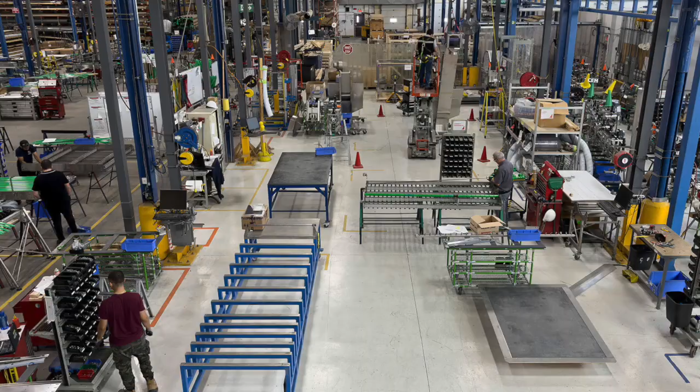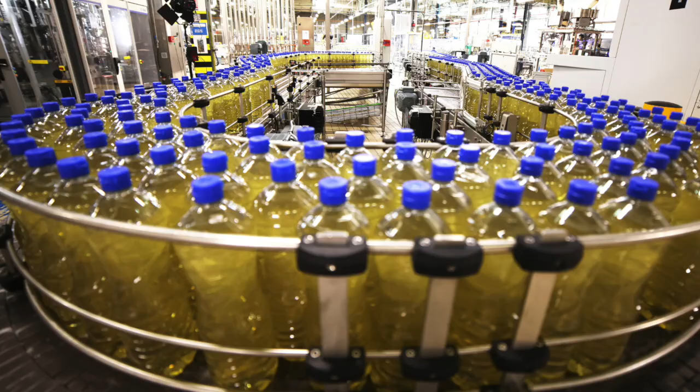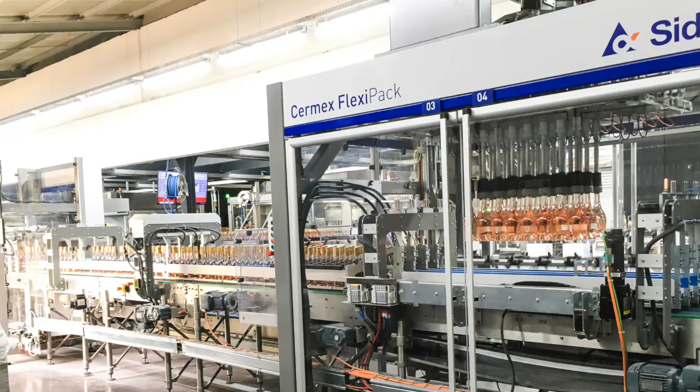Sidel is owned by Tetra Laval, which also owns Tetra Pak and De Laval. We're involved in multiple industries globally. From our Canadian facility here in Laval, there are two primary market segments we manufacture and provide services for: one is FHPC, food, home, and personal care, and the second is wine and spirits. These are the two markets we manufacture equipment for locally, because they typically require very complex, custom-made solutions, and here in Laval we have the expertise to handle that.

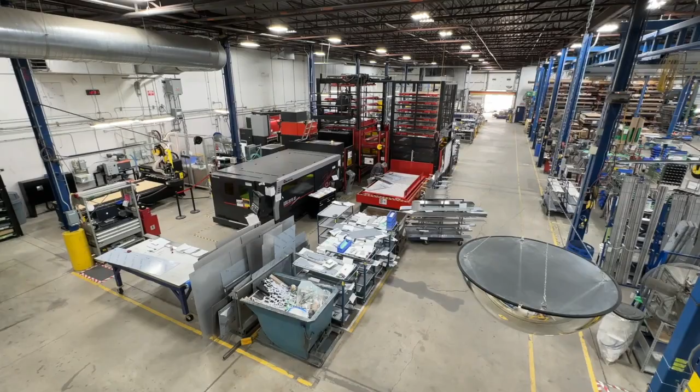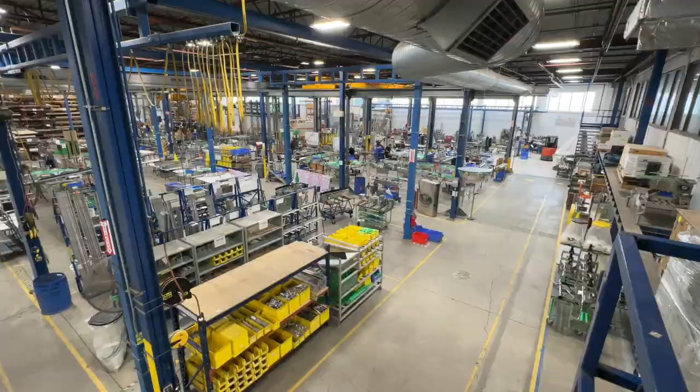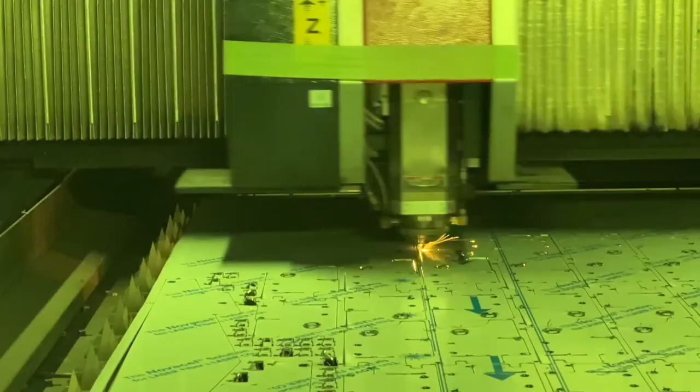The Laval facility is the only Canadian facility where we manufacture these products. What we supply to the North American market is essentially conveyors and cap feeding. We have 9,000 square meters of manufacturing and office space, and 217 employees. We also provide engineering services, and we are the hub for North America for engineering services.

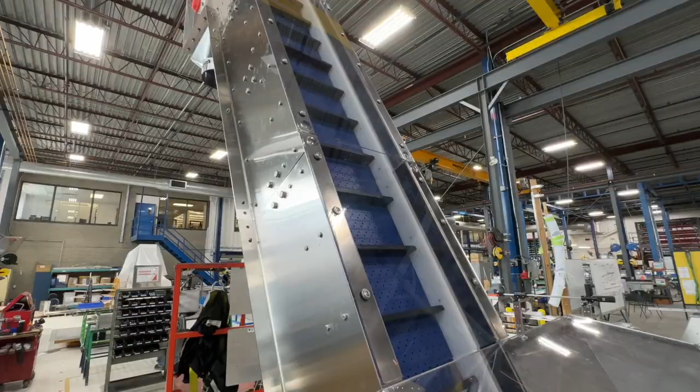Apart from FHPC and wine and spirits, we also handle beverage on a case-by-case basis, including alcohol and non-alcohol beverages, which is an important part of the market here in North America. These services set us apart in that we're able to put it all together to provide the necessary equipment and services to meet our customers' expectations.

Sidel is present in more than 190 countries with over 40,000 pieces of equipment installed all over the world. Sidel Canada is our main manufacturing facility in the region.

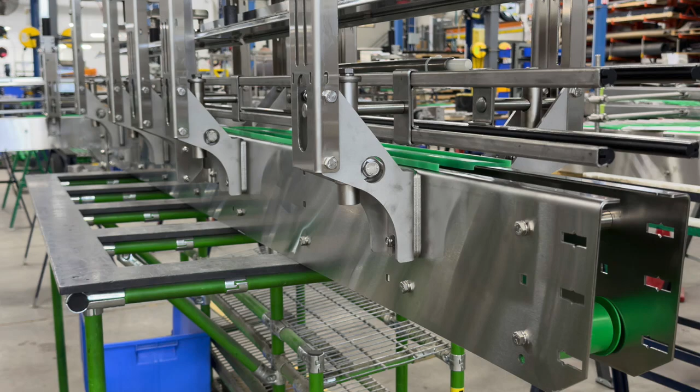When it comes to packaging innovation, Sidel has always been at the top of the chain. We're always looking into lightweighting our bottles in a smart way. We have a packaging team that sits with the customer and with our marketing team, and together we define what their goals are.

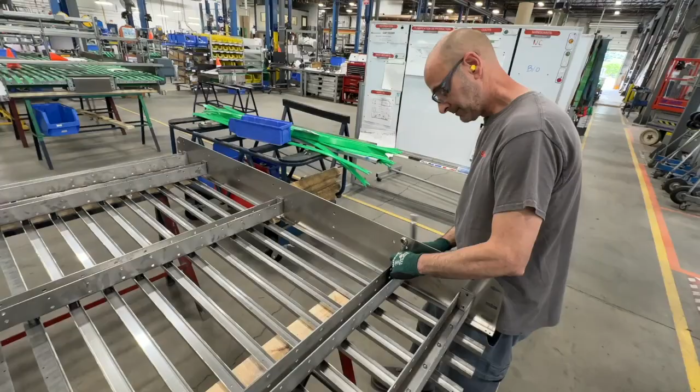When it comes to the packaging itself, there are certain aspects we need to cover. Customers tell us they'd like to achieve certain targets in terms of weight. With our feasibility tests, we can tell them exactly what's feasible for their products - yes, we can go up to 7 grams, we can go up to 8 grams, depending on the type of product they want to bottle.

We help the customer achieve those targets with our technology. Without that expertise, it wouldn't be possible - it takes a lot of engineering know-how to develop equipment aligned with consumer trends.

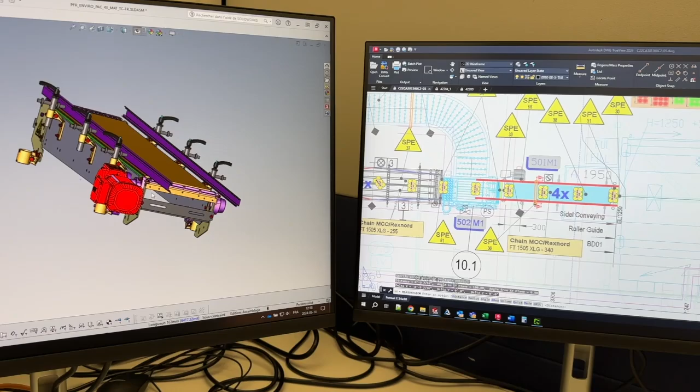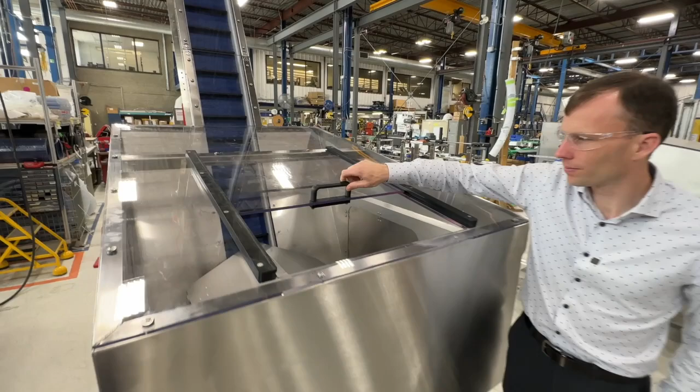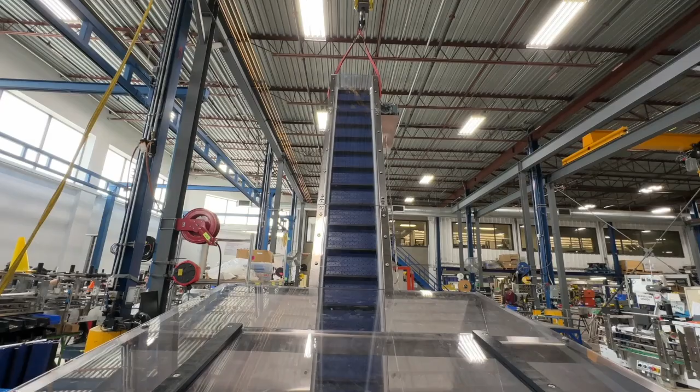We design and manufacture various types of stainless steel conveyors in different sizes and functions depending on the product we transport. The conveyors link all the machines on the line, creating synergy to maximize performance, and are important for accumulating product between machines to maximize that performance. It could be cans, glass, bottles, whatever type of product the customer has - we personalize all those conveyors to the customer's specifications.

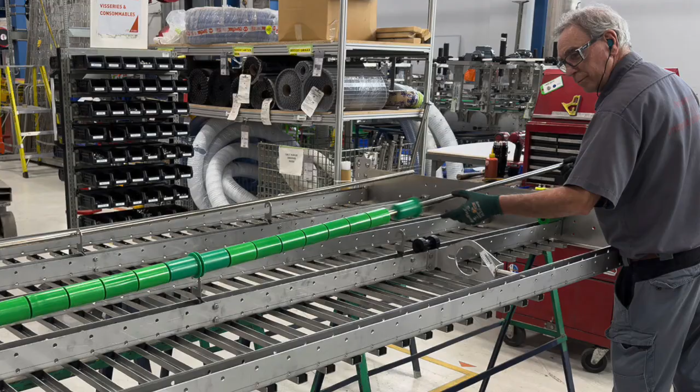Safety is very important for us. Internally we are certified ISO 45001, and we have dedicated people to ensure compliance of our products with all safety regulations.

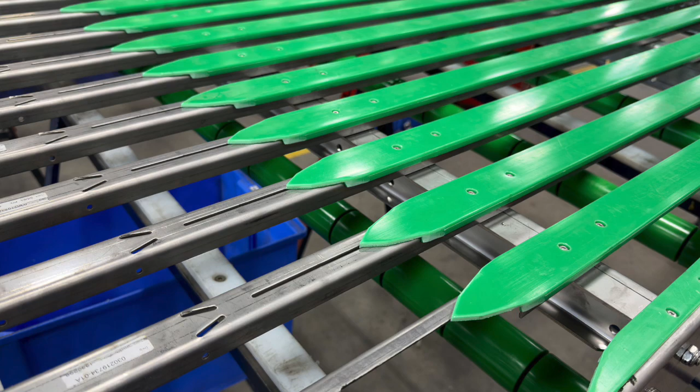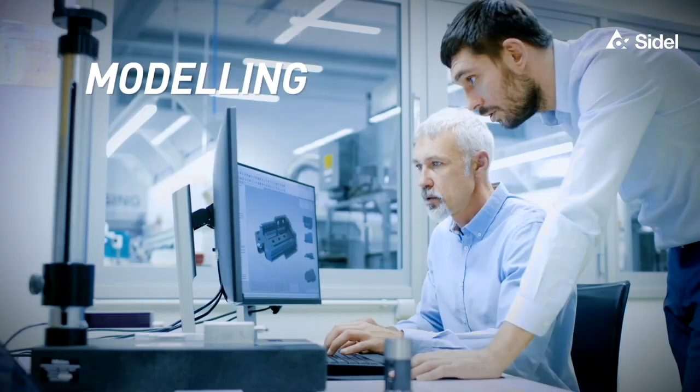The engineering services we offer differ from other companies in that we use a theoretical approach to line design, which is a proven methodology. It involves designing a line with certain parameters - V-graph, accumulation, mean time to repair, and so forth. These are parameters that are part of our design when we put together a line for our customers.

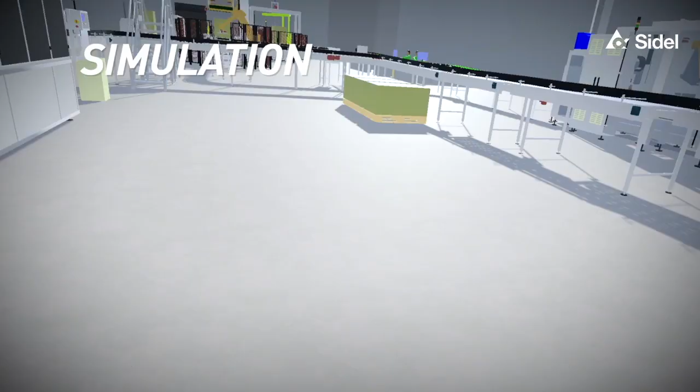What we do is simulate these solutions. The simulations allow us to give our customers a guarantee of performance, which really sets us apart from our competitors, in that we can, with certainty, simulate these line designs. Once simulated, it shows the customer exactly what they can expect from our line designs. That's very attractive to customers, in the sense that they're not just buying equipment from us, but a performance guarantee that they can hold us to and that we commit to.

The simulation tool is called Paxi. Essentially, we insert parameters and build a model of the line. Once the line is modeled, we run iterations and iterations of simulations that give us an overall performance we can commit to our customers.

We have conveyors that are set up that allow us to test the products of our customers. By doing so, we could essentially have a proof of principle of how our line design is going to work with the customer's specific products.

Industry 4.0 is an interesting topic. It allows our customers to be more effective, more efficient, and allows us to respond in a more rapid way. The way we respond to 4.0 is on a digital side. We provide virtual assistants, and we provide AI at times to help us take decisions.

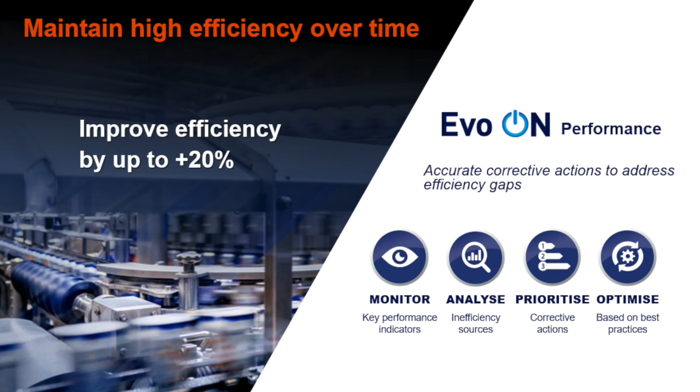So less downtime, more running of your production lines, more product out the door. The feedback from our customers on our digital solutions has been very, very positive in that they've seen the benefits, allowing them to start up a lot faster than doing it the traditional way.

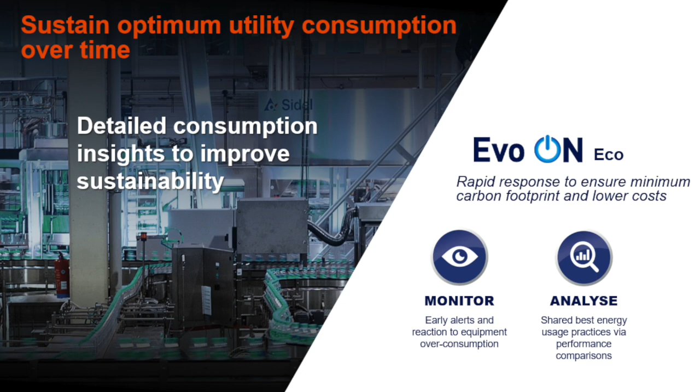Automation for our customers is very important in that they're always looking at how we could improve their overall line efficiencies and remove everyday manual work by automating. That's critical to our customers in reducing headcount while at the same time increasing efficiencies.

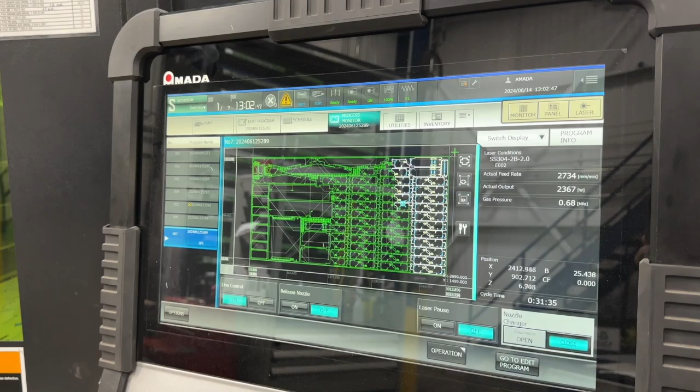We have over 60 project engineers, project managers, and startup and controls technicians. One of these technicians may be available in your neighborhood today.

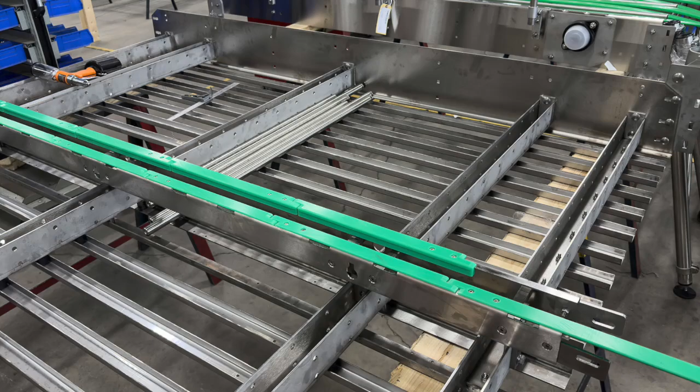We do all our drawings for parts and components in 3D. That allows us to send the documents and drawings to our customers for them to visualize, as well as to our suppliers, and then internally to manufacture and assemble the components as part of the overall conveyor solution.

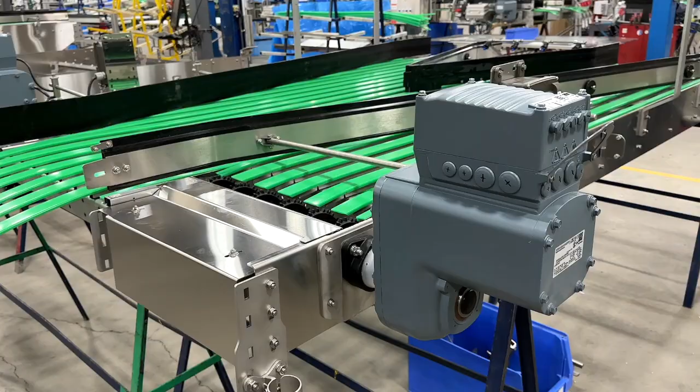This is a typical conveyor section that we build here in Laval for the North American market. In this specific case, what we're looking at is a merge table, which essentially merges two flows of mass containers into one. So the construction is quite simple.

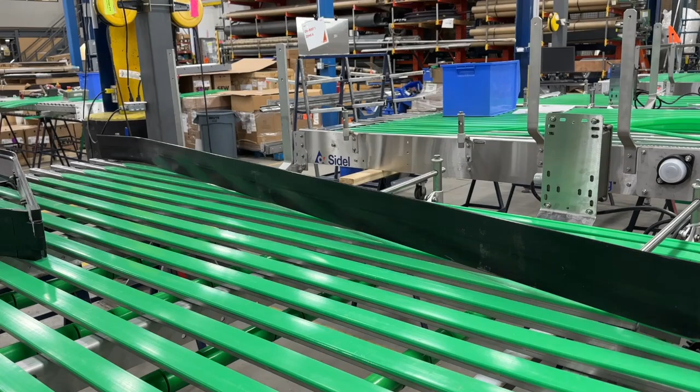What we have here is a series of modular components where we're looking at wear strips, these green components, as well as guide rails. When you put all this together, we have a sub-assembly of a whole conveyor section.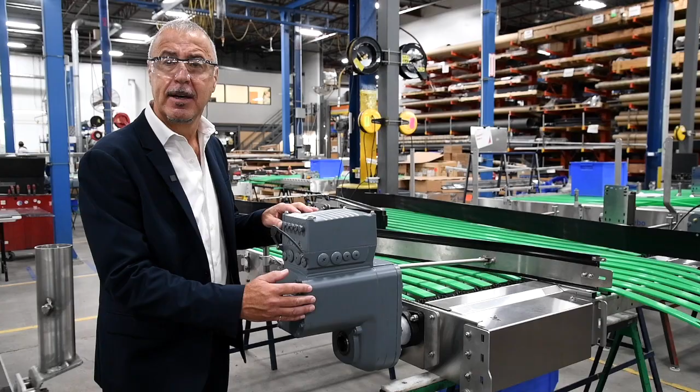Also what we have here are sprockets, which pull the belts that go on top of this conveyor. And what we see here also is what we call decentralized drives, a two-in-one solution where you have the gear motor and the VFD. Customers prefer these types of drives because they allow them to install the lines quicker, and to start up much faster.

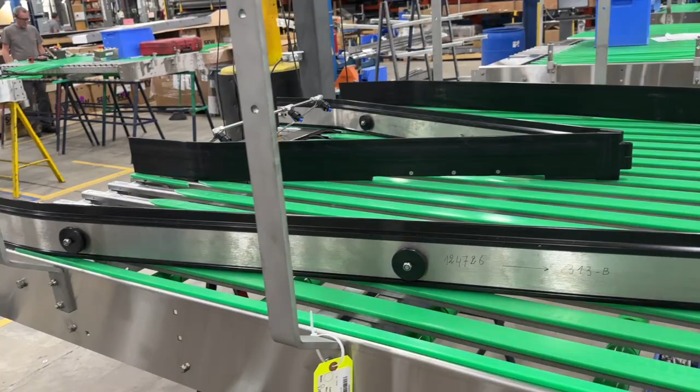The decentralized drives that we use are from SEW Eurodrive. They're of the highest standards and are recognized in the industry for the markets that we serve. These are the latest in innovation that we use to properly automate and control the conveyor sections.

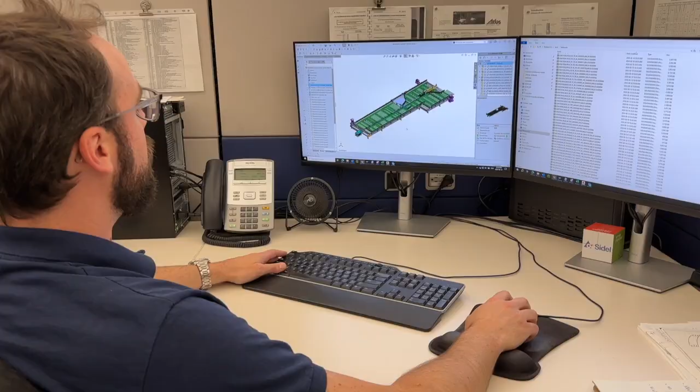3D design allows us to have an almost foolproof solution in terms of manufacturing parts, minimizing errors when it comes to both assembly and startup once we're starting up the lines. Our customers have given positive feedback on the improvements they've seen with 3D manufacturing and design.

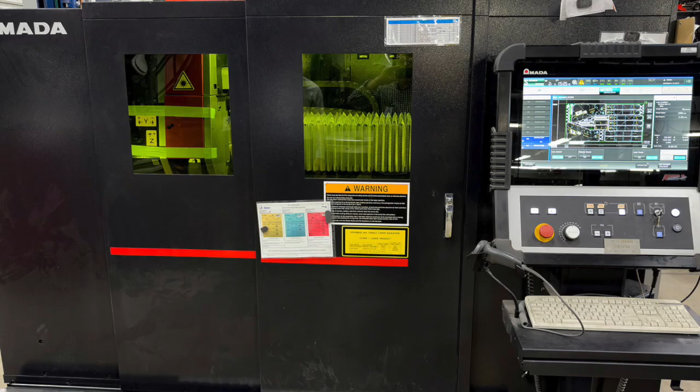Regardless of the needs and requirements that the industry is putting in front of us, Sidel is always at the top of innovation, and that's why we are developing equipment aligned with those needs. The idea is that our equipment will be able to work with thinner plastics, very lightweight preforms, and we will provide these to our customers and the industry.

At Sidel, we are dedicated to embracing new challenges and making a meaningful difference, not only on environmental matters, but also in fostering social well-being and responsible business practices.

Sidel's decarbonization strategy aims to reduce Scope 1 and 2 emissions by 50% and Scope 3 by 27.5% by 2030, compared to 2019 levels. We have already surpassed this target, achieving a 75% reduction by 2023.

Sidel is also working towards achieving net zero greenhouse gas emissions across the entire value chain, Scopes 1, 2, and 3, by 2050. Sidel is committed to being at the forefront of industry trends, and we want to provide solutions aligned with those needs. Our ESG commitment is pretty high on our agenda, and we are working towards providing a sustainable future, not only for us, but also for society.